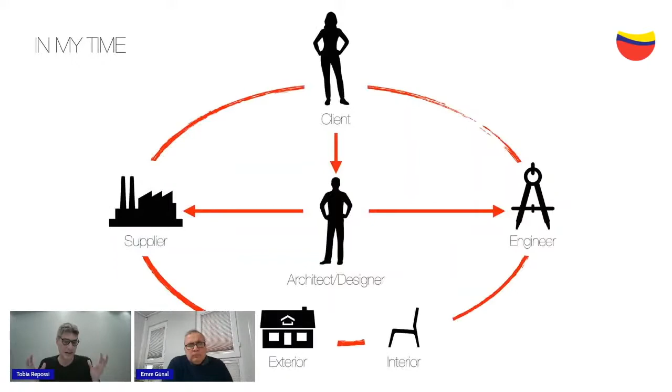So at that time, this was the scheme that was going on. There was a client who was calling or falling in love with an architect slash designer, so the same person incarnated both figures, which was very central in the process. He was calling and ruling all the suppliers, from the construction company to the wood or metal company making the furniture, and he was calling the engineer when things got a little tougher, or when he needed calculations for the construction, the structural part of the building.

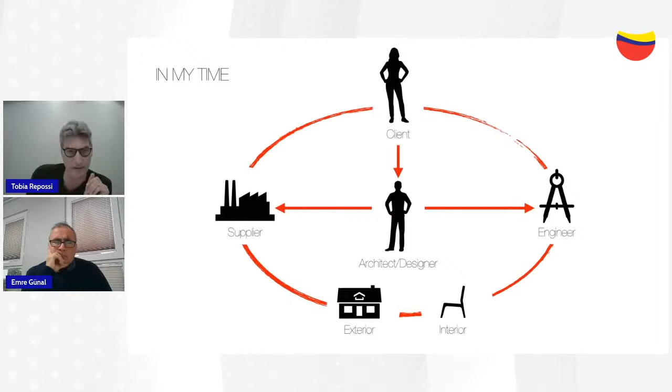At that time, the architect designer was taking care of the interior and the exterior of the space. Nowadays, in just 20 years, I believe there was a kind of revolution in our field, the industrial design field. So the field now is much more diversified, much more divided into many other subfields.

Think about all the product designers or industrial designers working in the field of transportation: cars, trains, bicycles, motorcycles, you name it. Designers like me that are involved pretty much in devices. Designers specialized in appliances: washing machines, dishwashers, fridges, ovens, everything that's a white good that goes in the kitchen. Naturally, furniture. In Italy, it's still a big thing.

We still have companies making furniture, and they still sell all over the world. But then there's kitchenware as well, like tableware, kettles, everything soft that goes in the kitchen. And of course, the fixtures and fittings.

So in a few years, we got in touch with companies that built an entire ecosystem of design products. Think about Apple, think about Xiaomi, or think about the huge ecosystem of Samsung, for example. They design from smartwatches to audio products, tablets, laptops, computers, even TVs and speakers.

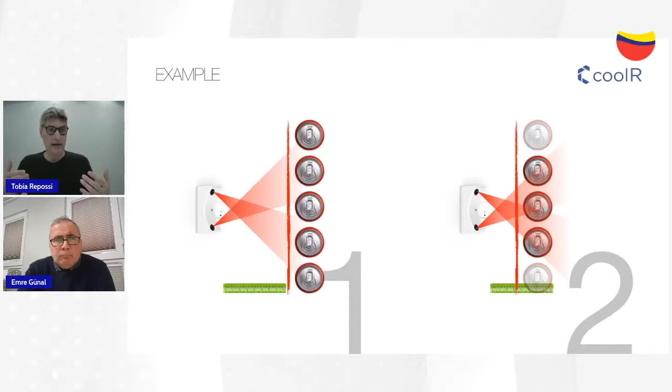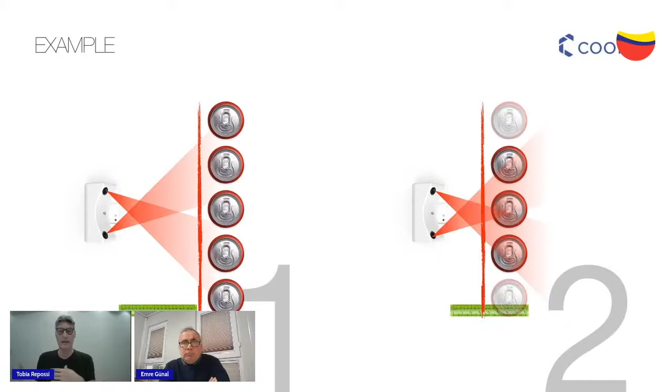The main problem is that when the camera is far from the product, it can have a field of view that captures a lot of product. But if it's mounted very close to the product, the field of view is reduced - you get more resolution, and in a way more accuracy, but you need either more cameras or accessories. This is how we started with this company, designing accessories - different types of joints for different mountings: wall mounting, shelf mounting, fridge mounting, vertical, horizontal, depending on the type of fridge - things that were movable. You don't want movable things in a supermarket, because you don't want the final user, the client of the supermarket, to mess up the product, but you also don't want your own inventory staff to mess it up either.

So we ended up with a different product, which is called Camera Vista. Actually, our nickname for this product is the Star Wars cam, or the Stormtrooper cam, because it looks like one of those Star Wars bad guys, the robots of the Death Star.

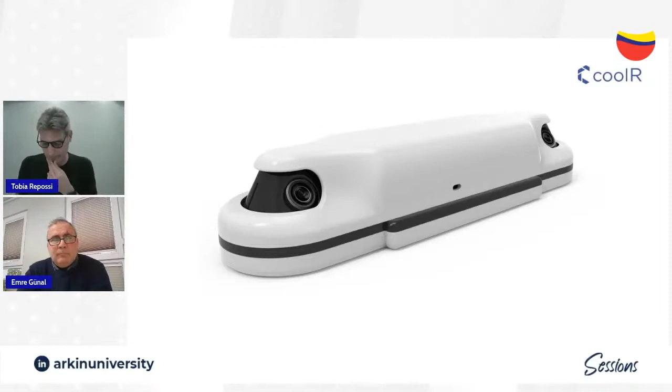And this camera still has these two cameras, which are mounted on a system. It's a kind of cone. Now I'm going to open the object.

As you can see, there are these two cones, and first of all, there are batteries. There are replaceable batteries inside. So at that time, a person from the company, if the battery was dying, had to go there and change the battery. Now the owner of the supermarket or the chain can do it by itself.

But as you can see, these two cones, they have a kind of gear, so they can rotate. This means that during the assembly process, which in this case happens in China, the workers, according to the type of clients that the company is selling to, can decide whether to put the cameras looking very, very far or very close, or having different angles for different typologies.

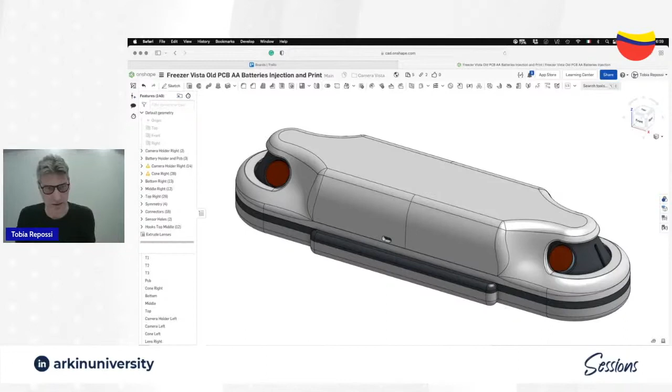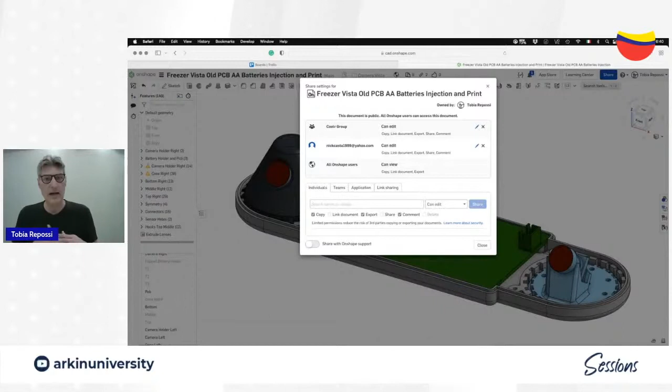So this is the software in action. This is the open camera. This is the PCB part, as you can see, as I described before, the two gears. And as you can see, this file has been shared with certain people and certain groups that can make comments inside the file, that can upload the data sheets, images. The client can say, no, I'm not approving this shape, I'm approving the other one. It has a very strong history of construction, so you can also leave the path for a crazy shape and then maybe go back, and the history remembers all of this.

One of the integrations that we use most, and this is a very time-saving thing, is called i.materialise. This is a prototyping company, based in Belgium. So what we do is usually we send the file to this company.

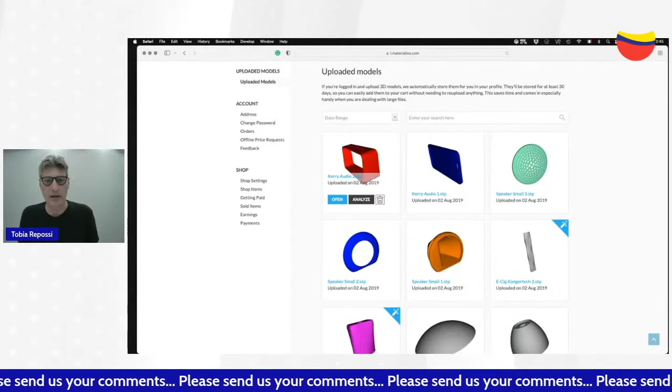They have all the pieces of the file, and they produce copies of the prototype. One comes to us.

On a random day, we all get a DHL or UPS carrier at our door, ringing the bell and bringing us the exact same product that we can discuss in a video chat. Or imagine that years ago, when we were doing the prototype, it was going here to the United States, from the United States to India. It was a total mess.

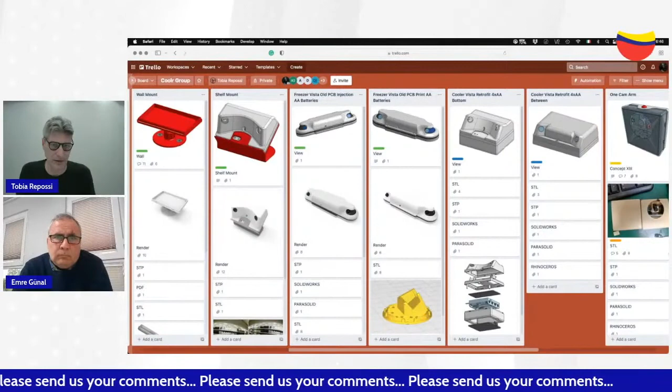So this is another very good time-saving tip. Like all the startups of Silicon Valley, the startups in China as well have their project management platform. There are many, like Notion, Monday, Slack. We use Trello, a board where you can upload pretty much everything - images, PDFs, data sheets, files - and people can comment inside.

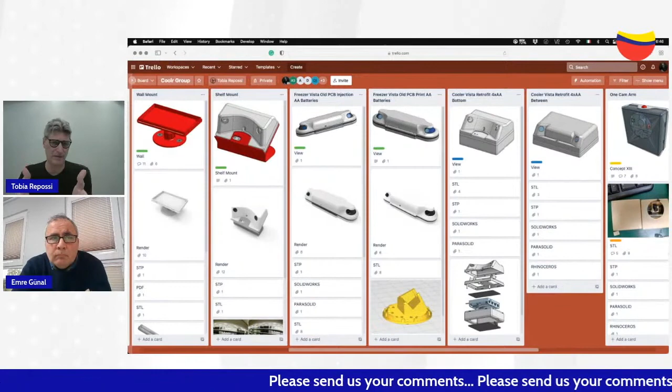These software are called email killers, meaning we don't have any email thread going on with the clients - everything happens here. No WhatsApp messages, no Skype messages, everything happens in here, and it's a very clean platform because you can tell who did what at a certain time, and you can mention people. See here they're writing me something, and I said, okay, we're not fine with this one, we have a problem with that one. So it's a very good way to communicate and keep things quick and clean.

It's very difficult to say, but some of the technologies that we have in our hands today are becoming reality. Well, one is definitely AR VR technologies. I'm experimenting a lot with them. I really believe it's gonna be the future.

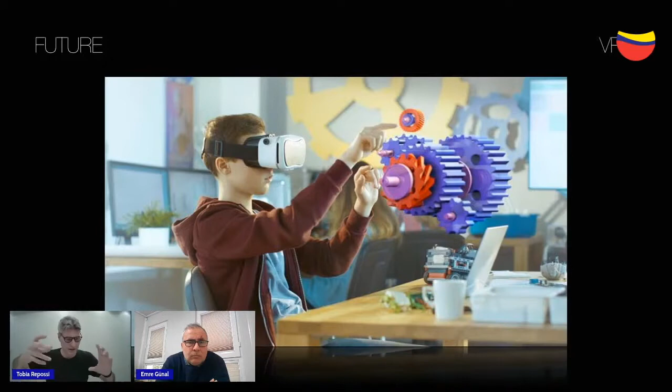So the idea of different people in different parts of the planet looking at the same thing, the same engine, the same design piece, and moving them together and understanding where the problem is. Imagine a company that needs to give support for a very complex machine, like the engine of a car or a train, and with these difficulties in flying, they're not able to reach the device itself, but they have to do support online.

And naturally, the collaboration part of these spatial Horizon Workrooms - I know it's still a toy now, still a gimmick, but I think after the pandemic everybody wanted a bigger human value in these Zoom meetings we're having, and wanted to see at least that you have somebody near you. So this platform is pretty good to design things together.

One of the things I'm mostly interested in with VR is all the modeling part, the design part in VR. There are incredible software like Gravity Sketch in which you're actually able to design things in 3D and appreciate the sizes, the proportions, and move the object while you're designing.

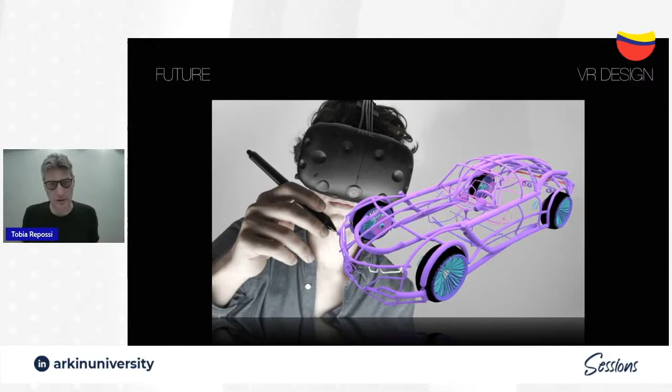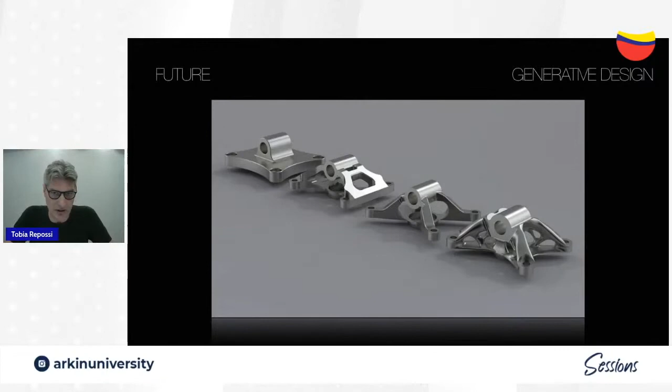It's absolutely cool. And one of the biggest technologies that some of my colleagues think of as a threat - I just think is so cool, and it's going to help us so much in the future - is the so-called generative design or topology optimization.

This software, you can give it some limits. For example, in this kind of joint, you can say okay, I have 4 fixed points which are the screws, and I have this cylinder in which a cable is passing, and that cable is applying a certain force to the joint. On the top left, you'll probably see what a designer like me would have done. On the bottom right, you'd see what the artificial intelligence of the computer would do. As you can see, there's between 60 to 80% less material there.

It's lighter. Imagine how useful it would be to send to space, for example, or in the automotive industry, to create pieces that are lighter nowadays. This is one of the technologies I'm strongly looking at, because I really believe it's the future of design. It's not going to kill the work of us product designers, but it's going to help design better products for sure.